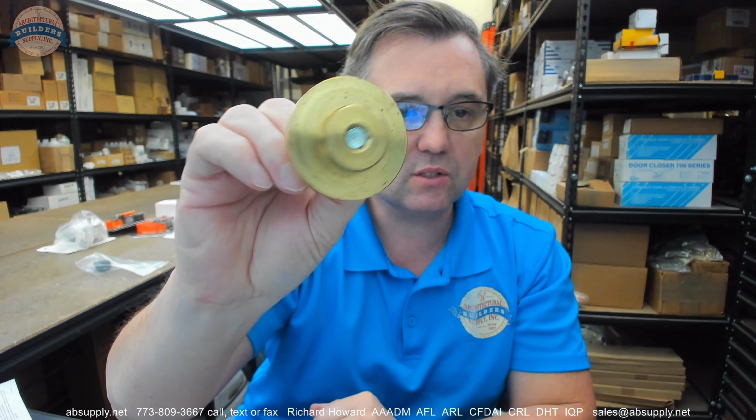This video is to bring you a closer look at the Pyro Chem part number 550938 Bleed Down Adapter Kit. This adapter kit includes the brass threaded flange, and then the hex cap bolt that will run through the center. This video is to simply serve as visual and dimensional evidence of this material. We'll take a quick look at the installation instructions, at least to point them out to you where they are located.

The outside dimensions of the flange, 2.132. The outside dimensions of the threaded portion here, 1.12. The overall thickness of the item, just to give you an idea of what that is, 0.775 between my finger and thumb. The ID of the threads in the center, 0.367.

Now, there is a link below this video to the installation instructions, so let's switch to the screen view and take a closer look at that.

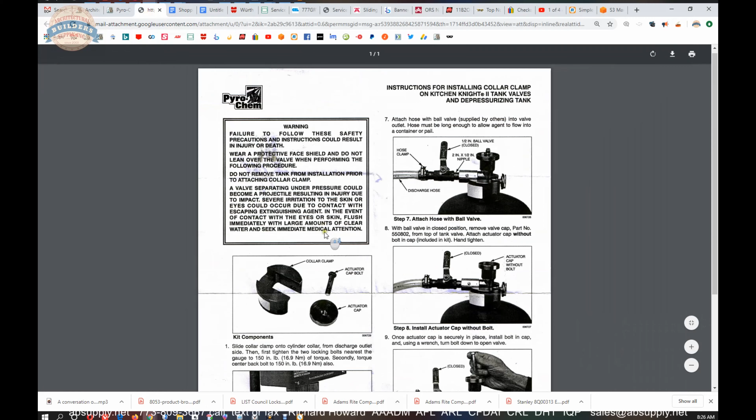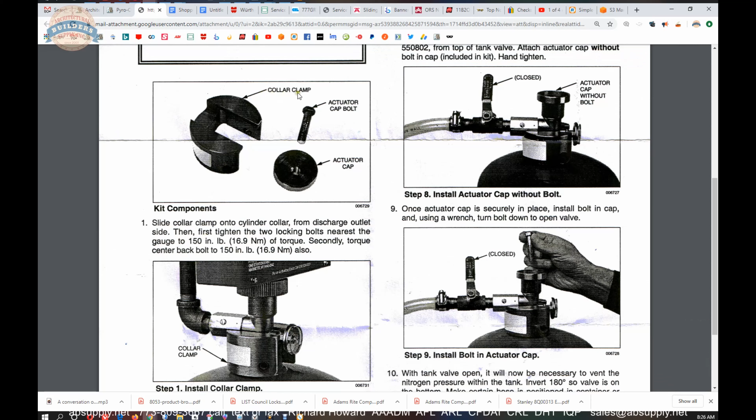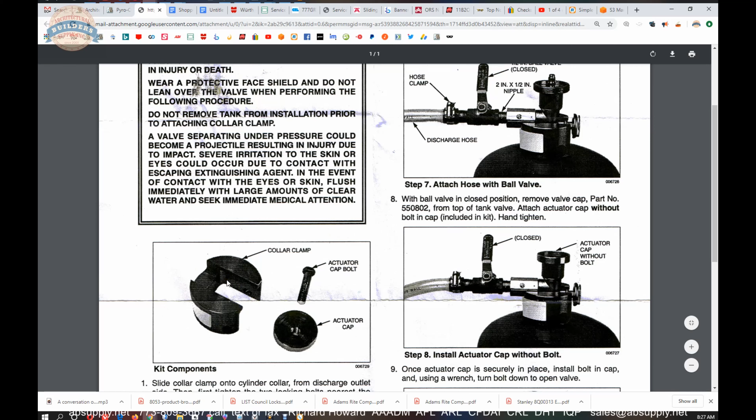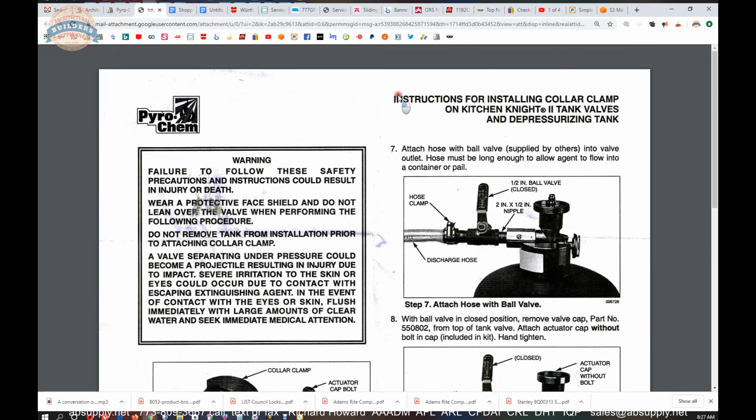Now, the installation instructions are linked to down below this video, and the first thing that catches my attention is this collar clamp is mentioned. I reached out to the manufacturer, and they specifically stated that this was not part of the Bleed Down Adapter Kit. You know, I would say for me at least, it would be helpful if they were to indicate that part and provide the part number is not included with the 550938. However, these are installation instructions for installing the collar clamp and not the 550938. So that part number specifically does not include the collar clamp. So it's not disingenuous or misleading. My initial reaction, not knowing that it is or is not included, makes me think that it's included, or question whether or not it's not included at all.

So you'll be able to review the steps on how to install the actuator cap, and I won't go through the individual steps, but they're linked to here down below.

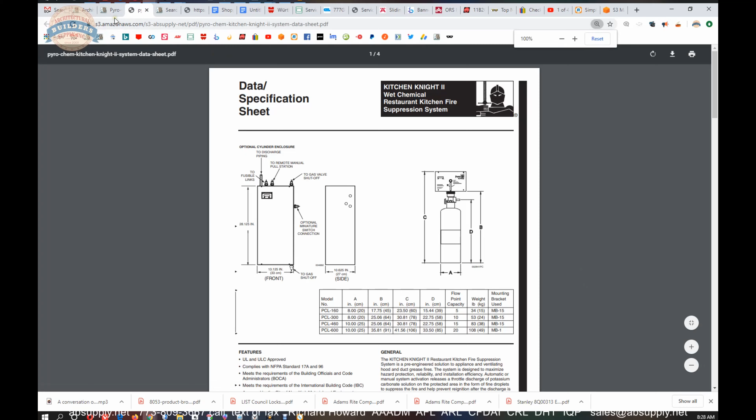The data sheet is here, along with the system brochure. And those documents are going to refer to the Kitchen Knight II overall system of fire suppression equipment. Let's wrap up this video on camera.

Okay, so the name Pyro Chem is synonymous with fire suppression systems. They're certainly not the only company who produces such systems, but nonetheless their name is quite synonymous with it.